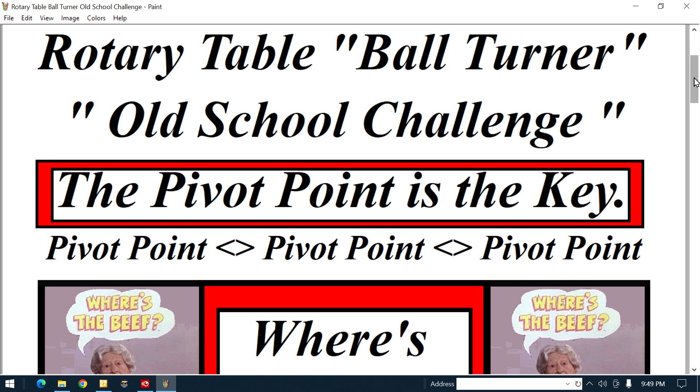Anyways, the key to this whole thing is I see these guys making these ball turners. Everybody's obsessed with them. All kinds of shapes, sizes, configurations. I'm really not impressed with any of them. There are a few. These guys are creative, don't get me wrong. They make some cute stuff. But I don't know if I ever recalled anybody measuring one to size, shooting for a size and hitting it, and it being spherical. I'm sure there are a few. I didn't see them, all right?

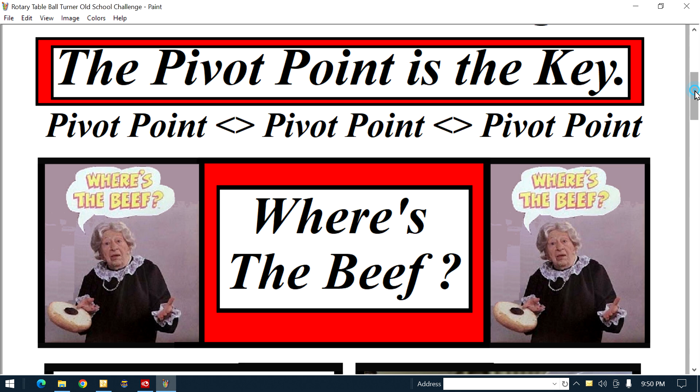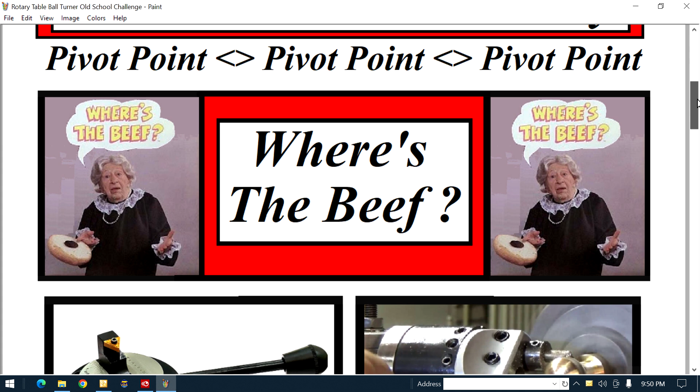Most of the ones I see, guys are trying to turn a ball. It looks like a football. Not even close. Why is that? They haven't got a fucking clue where the pivot point is or how to move it. You understand? All right, let me take you down where I am, down into the generation gap, back to the 60s and 70s, where we were making this kind of shit. When somebody said they wanted a certain size ball, they wanted it spherical. They didn't want it filed into shape. They wanted it machined to shape. You understand? They didn't want a form tool. They wanted it machined. I'm going to show you how to machine it.

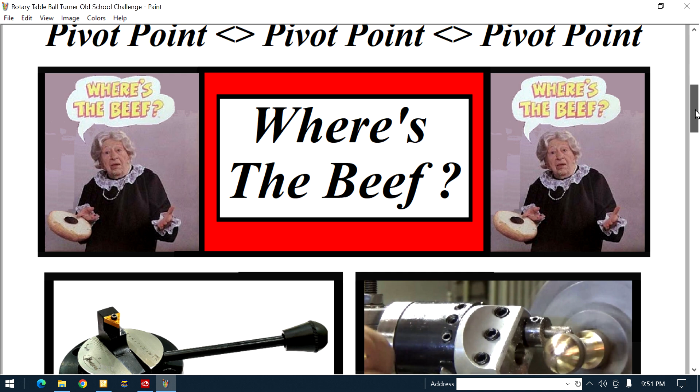All right? You see this thing here? Remember this commercial? Where's the beef? Right? I'm saying, where's the pivot point? Right? That's the key to this whole thing. See it? The pivot point is the key. All right? Now let me show you a few of the ball turners.

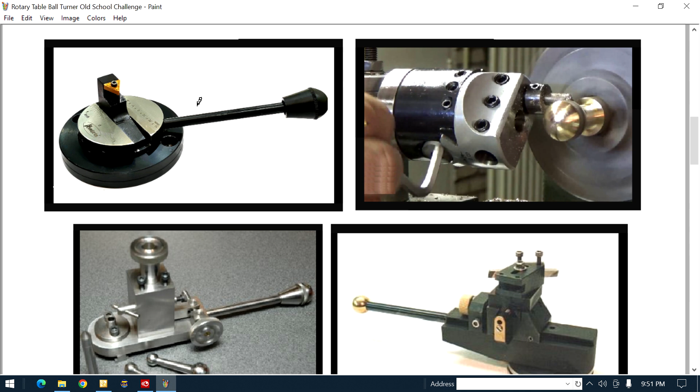Top left. Pretty. Nice looking. Right? It might have some graduations on it. I'm not sure. But don't know. Anyways, now top right, boring head. If it's hung on a quick change tool post, if that's dead on center, now you can measure the sphere, right? But the point is, do you know where to put that pivot point? That's another point. Right, guys put them all over the place. Bottom left again. Whole bunch of components. I'm sure all for a good functional reason that I don't understand at the moment.

Right, the right hand side, shoe looking unit, right? Creative. These guys are creative. Here's an older one here. That hung off a quick change tool post. You can see the area where the mouse is. Got clamped in there, and then this handle pivoted it. I guess a pin came down here, and you measured from the pin to the tool. I don't know. Alright? But that's early stuff. Alright? This one here, that hung from a quick change tool post.

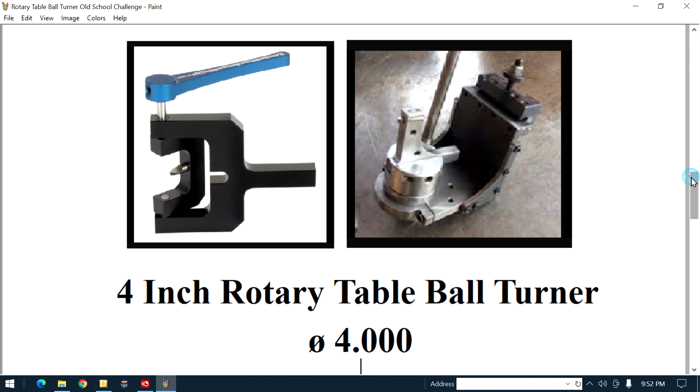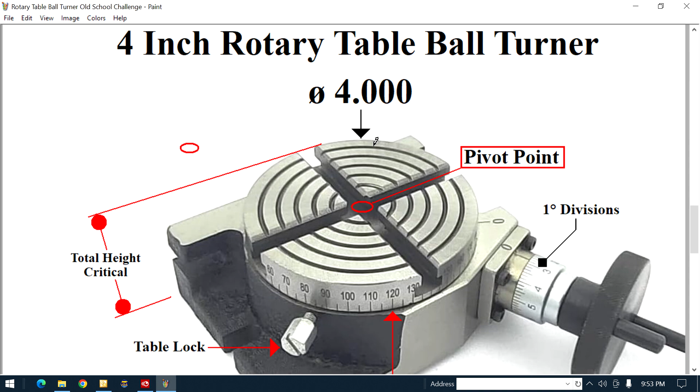Alright, now let's go up to what I plan to do. Can I do it successfully? I think so. But I'm gonna let you in on it. Here's what I did. I did some research on a 4-inch rotary table so I could make this silly thing, right? And there are a few parameters that I have to have, otherwise I can't make it. Let me go down here. See these, follow the mouse, see the red lines? The total height from the base of this rotary table to the top of the rotary table has to be as low a profile as I can get, so I can get it under the workpiece in the lathe. You understand? I'm going to adapt this. I'm going to take my lathe compound off and adapt this to go on it so that it's nice and low and rigid, all right?

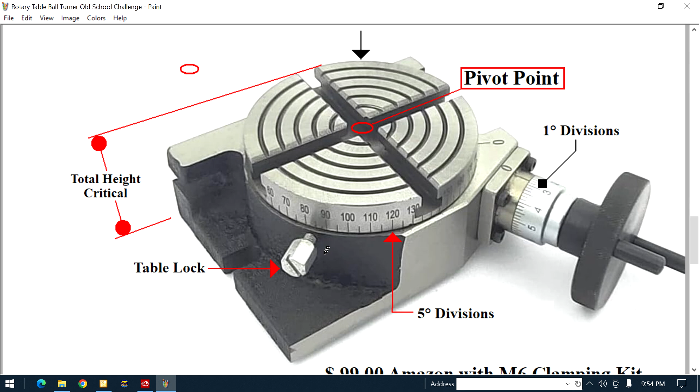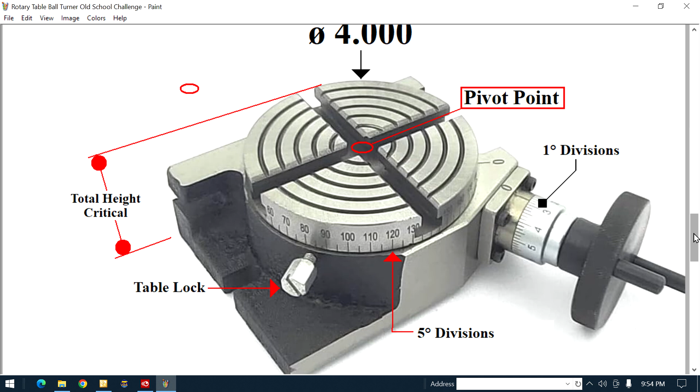Anyways, in the research, first of all, I'm going to point out the pivot. Well, let me do this. See that says 4-inch diameter there, right? Just letting you know its physical size. See this says pivot point, obviously dead center. When I put that hole in, I'm going to mill it in using the table so that the hole will be concentric to the movement of the table. I'm not going to put a boring head in there. If I was offset, the hole wouldn't be concentric. You mill that hole in. You understand? You might think I'm nuts, but I don't give a rat's ass.

All right, furthermore, in my research, I watched a guy take one of these. He did a video, took it apart. The worm wheel and the worm were a nice fit, which really, I was excited about that. The graduations on the collar were in 1-degree divisions. You wouldn't believe it. There were others, instead of having 10 divisions in a circle, they had something like 12 or 14. The math was wonky as a bastard. I don't get it. This one had an even number of divisions. Understandable. Right? So you turn this thing 1 revolution, you get 10 degrees.

You see the graduations on the OD of the table? 5-degree increments. 5, 10. One turn of that hand wheel, 10 degrees. That's easy enough for me. All right? See this thing? It's called a table lock. So when you find where you want to be, obviously, you can put a screwdriver or a hex wrench on there, tighten it up.

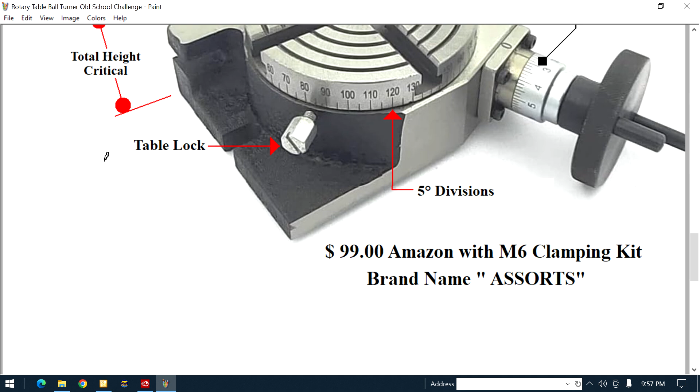Where did I buy it? Amazon, $99. It came with an M6 clamping kit. That don't mean shit to you. What it really means, they define the part number. That M6 clamping kit fits a 3-inch and a 4-inch rotary table. It allows you to bolt it down flat to a milling machine table or vertical to a milling machine table. The brand name is ASSORTS. You see it? So if you're going to consider buying one, maybe my research will have helped you.

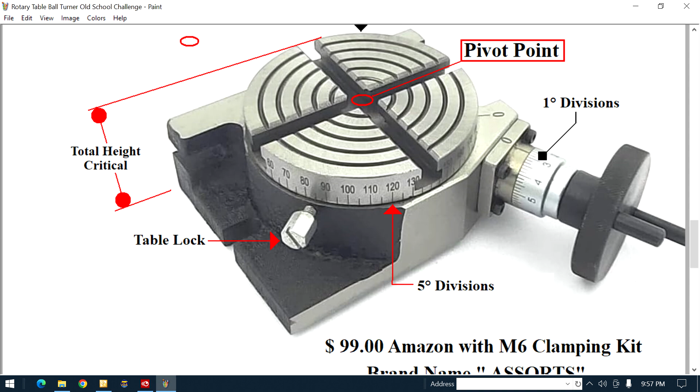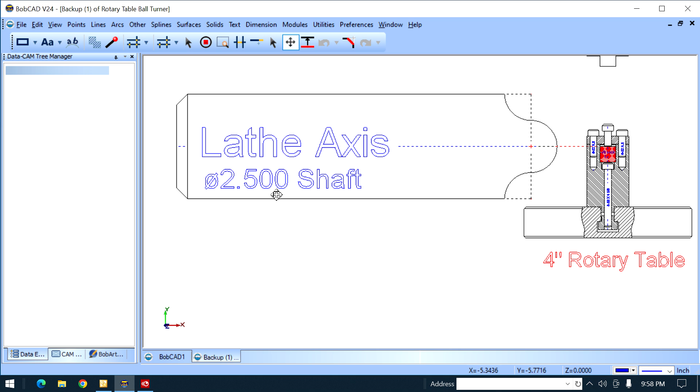Right now I'm going to show you what this thing can do, or what I hope it can do. Hang on, I'm going to take you to my CAD system. All right, now you're in my CAD system. I call it a scribble sheet. See this, where the mouse is? Top view, 4-inch rotary table. Side view, 4-inch rotary table. See this thing beside it? That's a 2.5-inch diameter shaft. I want to make sure that this part of the rotary table is under that shaft so nothing rubs.

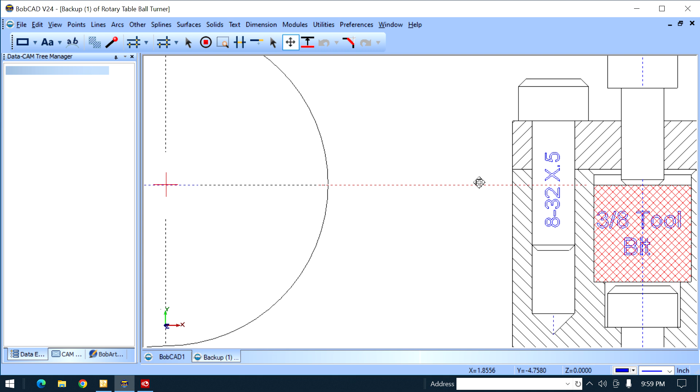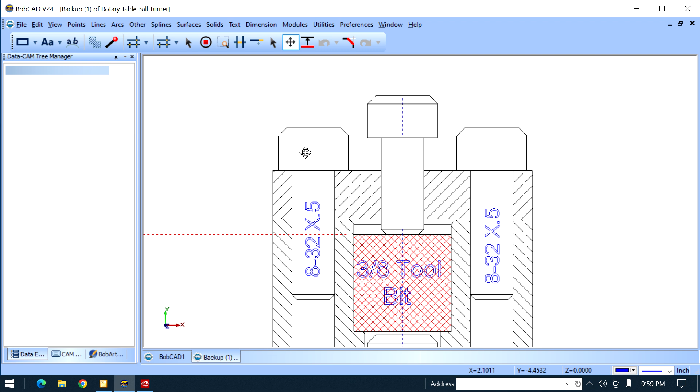Now you see this thing standing vertically? That holds the tool bit on center. You see it there? There's the center line. Right? So the top of the tool is right on the center line. Never have to worry. You see this? An 8-32 screw below it. T-bolt pulls everything down. See this here? A cover, some screws. These two are down, and that one should be lifted and lowered to slide it. Let me bring you here. A lot of shit left out, but there's enough here to let you know.

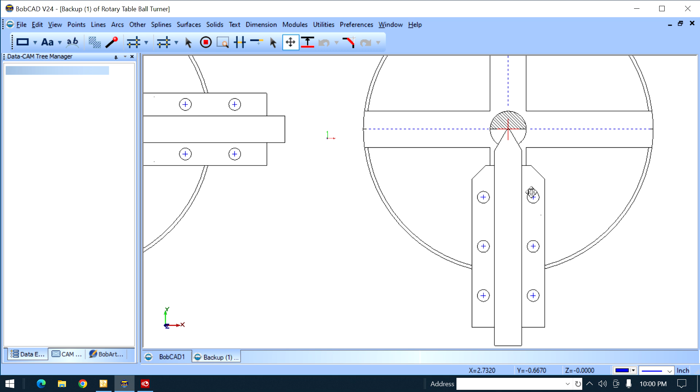All right, now you're looking at it with that block fastened to the rotary table. These holes, 8-32, I'm showing them here with the heads on. Now you don't want to hear all that. I took this and I turned it 90 degrees here, just to show you it's pointing in that direction. You understand? All right, there's one thing I forgot to show you.

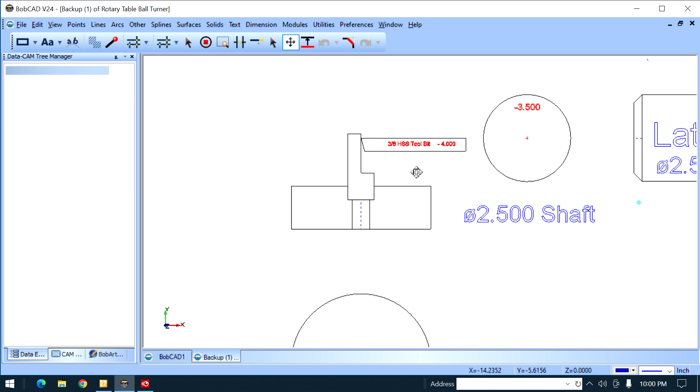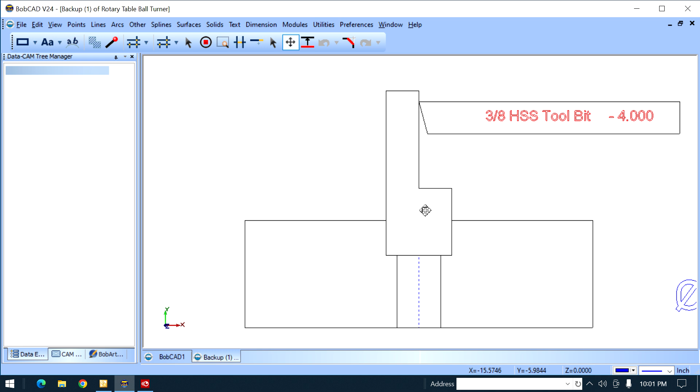This is the 4-inch rotary table. In it is a pin. This is a pin. It fits in there real nice, right? And half of it is milled away. So this line right here is dead center. This pin can revolve by hand. All right, it's got to be a goddamn nice smooth fit. All right, now I use this pin like you would use an edge finder. All right, let me move this tool bit out of the way. Let me see.

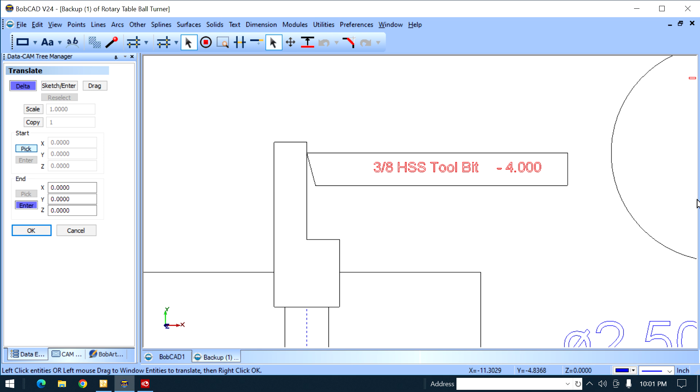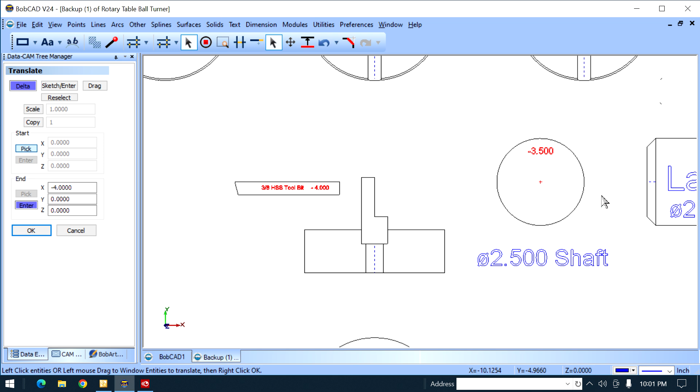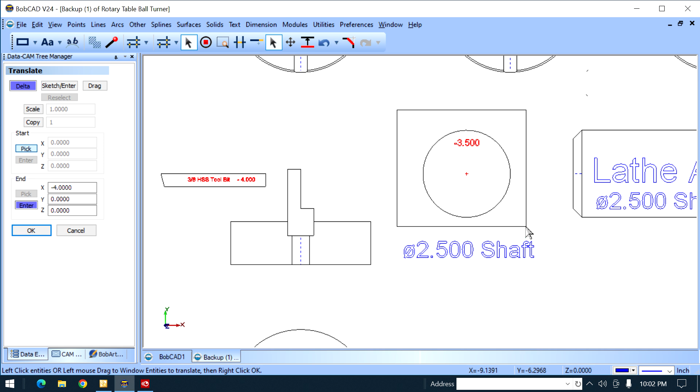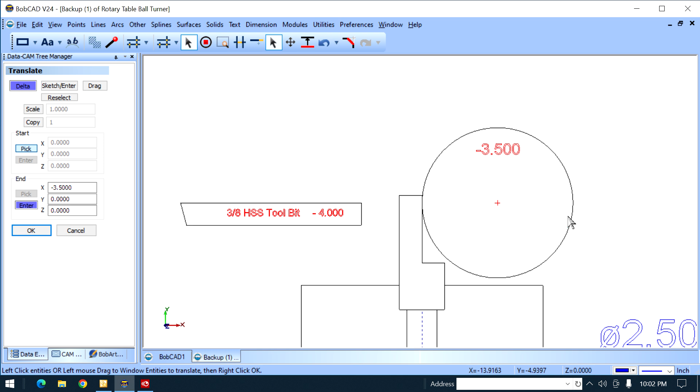All right, now that's open. You see this? That's a 2.5-inch diameter. Don't let that 3.5 fool you. See, that's 2.5 right there. If I wanted to touch off on the edge to find out where to put the pivot point, I could do it. Let me show you. Just a little thin bit. You see? So you touch off there. That edge is dead center on the rotary table. You can either lock it in with an indicator, lock it in with a DRO, but you can get the position of the pivot point. Let me get this out of the way.

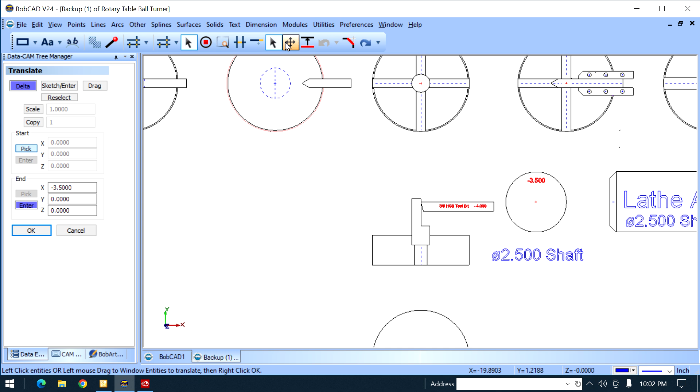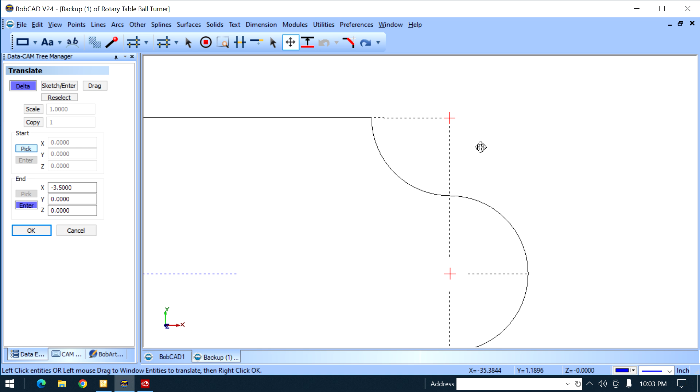All right. Now I'm going to show you right here. I got a whole lot of shit here, but I'm only going to do a little. See what I do up here? 2.5 inch diameter shaft, and I got 4 quadrants, quarter of a ball. You see that? You do it all the way around, that would be 1/4 of a ball. The side obviously the same. Now looking at this side, it's half a ball. Alright? But these are the pivot points. If you want to draw one up, that's what you would draw.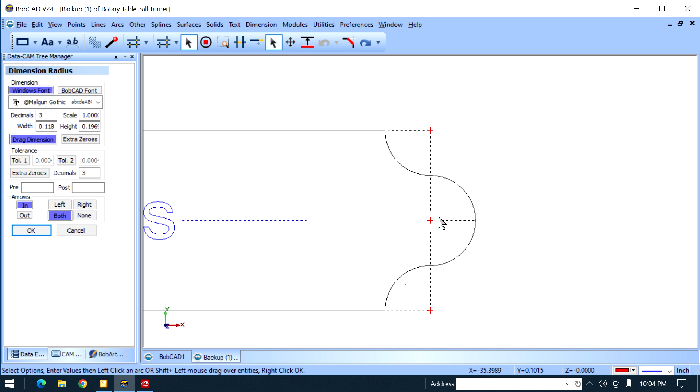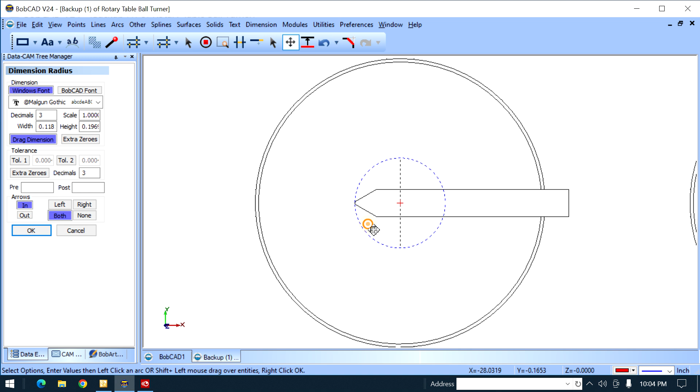Let me define it for you. I'll dimension this. Let me get all that garbage out of the way. Alright. See that? .624. .624, you see it? They're all the same. See this invisible line? Let me just... That's .624. Everything's .624, just to let you know.

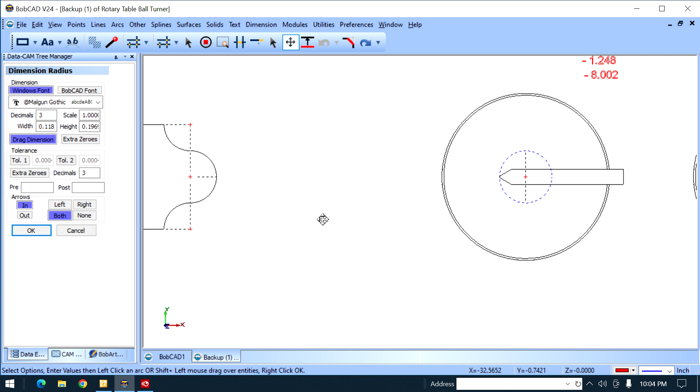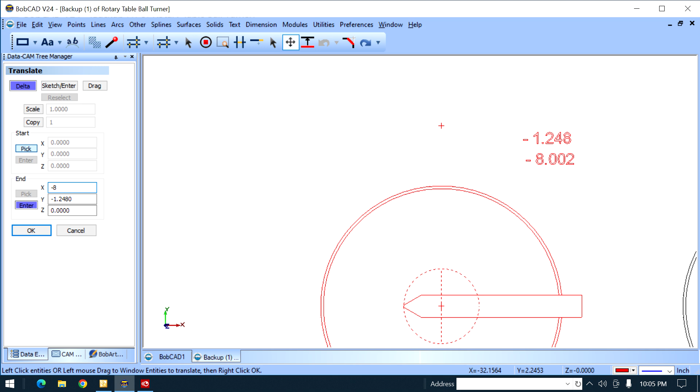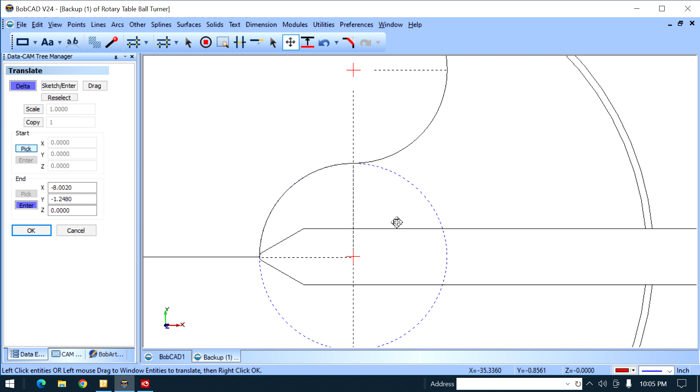Okay, now the trick. And it's easy. The trick to cut this part right here. See it? With this preset, which is easy. I'll show you later. Right? I'll show you how you can pivot that table and cut what you want. Alright? Okay, I'm gonna... hang on. Now the trick is to put this pivot point, see it right there, onto that pivot point. And you can do it by locating, like I showed you. Alright? Locating that is easy. See it? And you know this radius, you know all the radiuses already. I'm going to pivot that. Oh, okay.

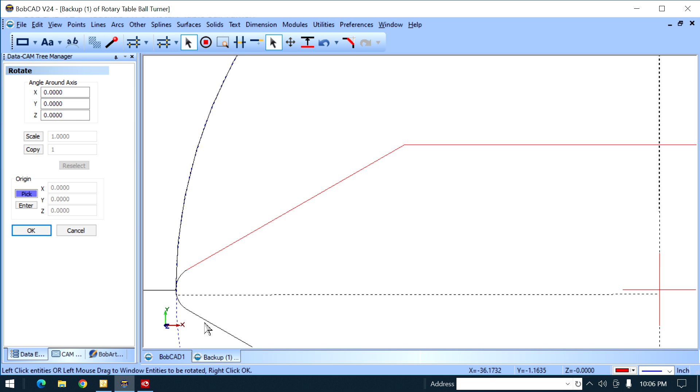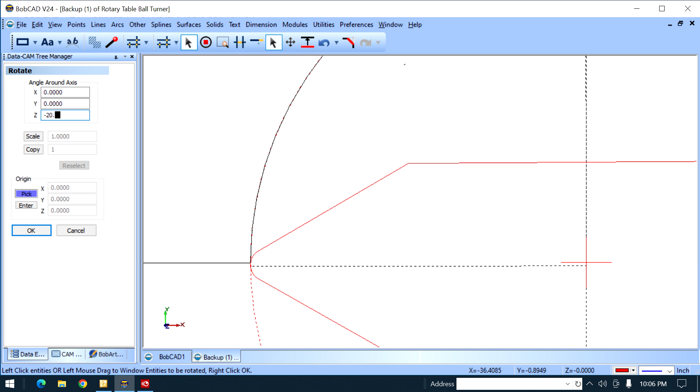Damn. All right. Now I'm going to rotate that table and cut. Go on, you piece of shit. I don't know what's wrong with this thing. You buy cheap, you get cheap. There. That's gonna come right up. Ain't gonna interfere with nothing. See it come right up, nice and sweet. Alright? I can do that with all the radiuses. I can make this pocket and do what I want.

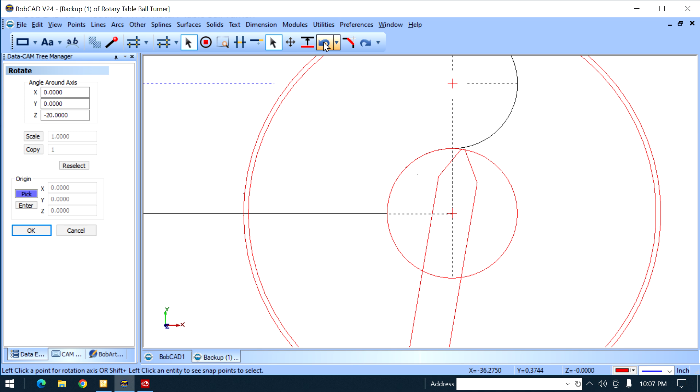Alright. I took enough of your time. I can do a whole lot more, show you how to make this work if you're interested.